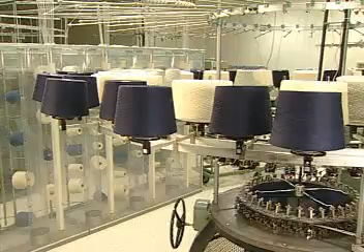Let's start by taking a look at the big picture, the basic configuration of most knitting machines. Commonly used for single knits are circular knitting machines, which pull their yarn supply from creels located either above the machine or next to the machine.

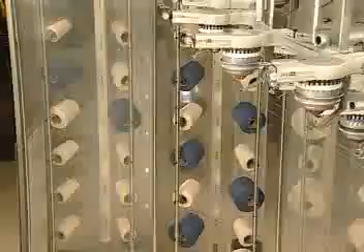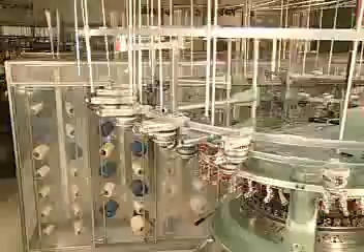To make it easier for technicians to service the creels, it is more usual to find creels located at the side. In this position, less lint falls into knitting elements. Larger packages can be used, and more feeds can be placed on the machine. Whether the creel is at the side or top, the principles for circular knitting are the same.

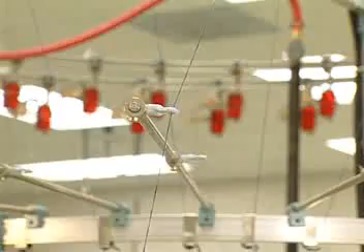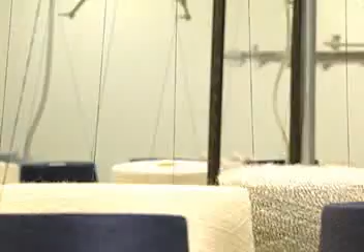Fed from above the knitting elements, yarns move from the yarn supply, or creel, through guides to stop-motion controls above the machine, then back down through tension controls and yarn feeding devices to the knitting elements. Quality products can be produced only when stop-motion and yarn feeding functions are properly set.

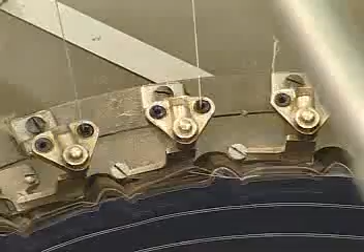The intricate action of knitting, where needles form loops, occurs at the middle of the machine, between the take-up and the yarn feeding mechanism. A close-up shows you how, with circular weft knitting, needles knit one after the other in a sequence for each yarn. Notice how loops are formed horizontally by needles knitting around the cylinder, forming a tube.

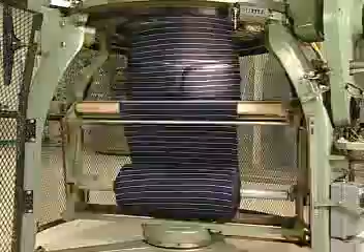After yarn is knit on the knitting elements, the knitted fabric is passed over a spreader mechanism through take-up rolls and is wound into a roll. This elliptical spreader distributes the take-up tension uniformly and enables the fabric to conform to a flat tube.

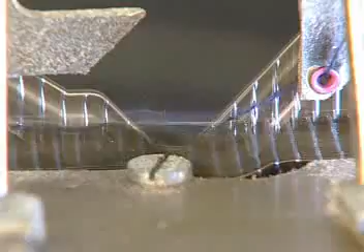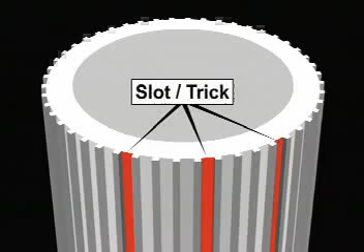In this segment, we describe how needles actually do their work. How are the needles arranged, and what causes them to move? Knitting machines are designed so that each needle can be placed in a groove, cut into the outside of a metal cylinder. Before we show you how these cylinders work, let's define the parts. The cuts or grooves may also be referred to as slots or tricks. The top edge of each groove is called the verge.

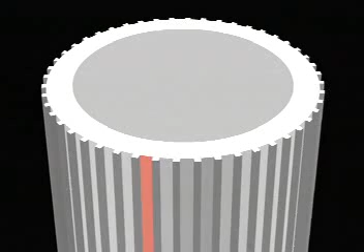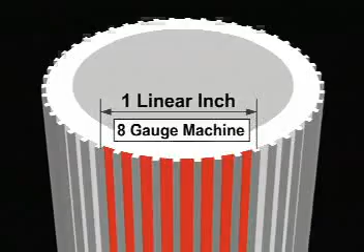These cylinders are very precisely manufactured, so the diameter measured at any place is equal. Machines are classified by the number of cuts per linear inch. This is referred to as the cut or gauge of the machine. For example, an 8-gauge machine has 8 cuts per inch. The total number of cuts around the circumference of the cylinder would indicate the number of needles in the cylinder. The more needles, the wider the fabric.

Now let's take a closer look at the needle itself and label its parts. At the top of each needle is a hook. Below this is a latch, attached with a rivet. Notice that the bottom edge, or cup of the latch, is curved, to fit over and completely close the hook. At the bottom of the needle is a butt, which plays a part in controlling how needles activate, up or down. A needle with a latch is very efficient. When the latch needles are used to create weft knits, the knitting cycle can be completed without any auxiliary attachments.

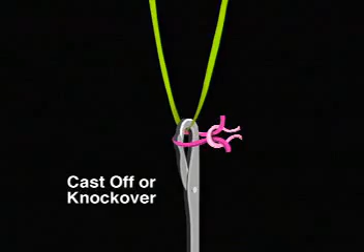Here's how the latch needle works. At rest, or running position, a knit loop rests above or on the latch. As the needle moves up, the old loop, already formed, drops below and clears the latch. As the needle moves down, it receives the new yarn to begin forming a new stitch. The latch is knocked over by the old loop, and this old loop is cast off. The needle moves further down to fully form and complete the new stitch.

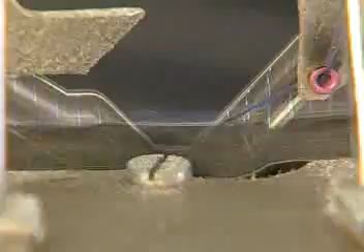The amount of yarn used to form a new stitch determines the stitch length. This is important because stitch length affects the weight, width, and aesthetics of the fabric. On modern-day knitting machines, needles make millions of loops or stitches a day. Needles may need to be replaced due to wear, but they usually last up to 6 months, depending on construction, yarn type, fiber type, and speed.

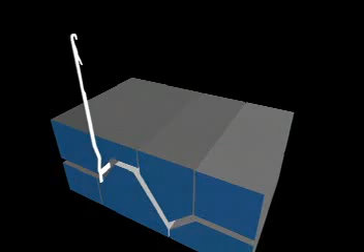Next, let's take a look at what causes the needles to move up and down. In this illustration with a side view, you see how the butt of a needle guides the needle through a path formed by cams. Each cam is designed to allow the needle to run straight or to move up and down. Here's how the needle travels through various stages. At the rest or running position, the needle runs straight over the rest cam.

When it hits the clearing cam, it rides up at a steep angle, which forces the needle to rise and clear the old loop. Then the needle drops when it contacts the stitch cam. As it continues on its path, it catches the new yarn. It continues further down, pulling the new yarn far enough for a new loop or stitch to form as the old loop is cast off. The upthrow cam returns the needle to its resting position so it can begin the cycle again.

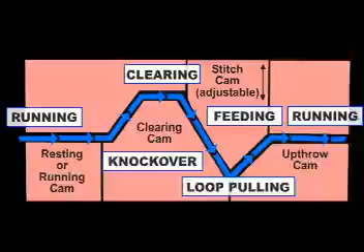Take a look at this same action while the machine works. Watch how needles run through the camways, which cause the needles to rise and fall. And remember that this machine has a cylinder that contains vertical grooves and slots to hold the needles that move.

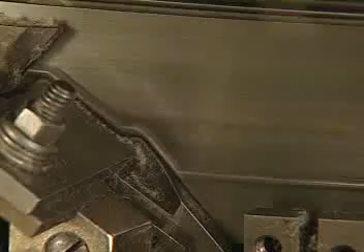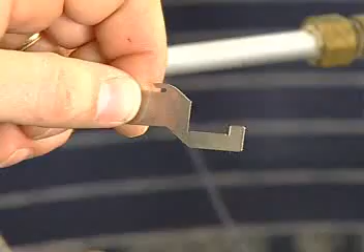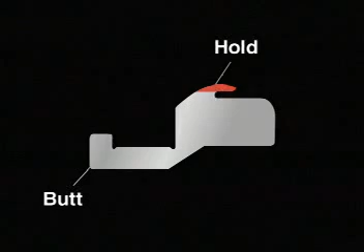As needle activation occurs, how does the machine control the movement of fabric as it knits? There's one more part, placed between each pair of needles, that you need to see to better understand this. It's called a sinker, and here's what it looks like. It's a thin steel element with a distinctive shape. This illustration highlights the parts. A sinker has a butt with a place to insert a cam. It has a hold, a throat, and a nose.

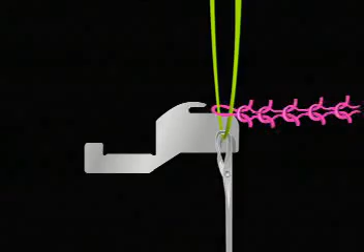As the needle goes up, the sinker moves in to catch the fabric in its throat. Since the fabric can't go up with the rising needle, the old loop now clears the latch. When the hook catches a feeder yarn as the needle moves down, the sinker moves back out of the way, and knockover, cast off, and stitch forming takes place. As the new stitch is formed, the fabric rests on the top of the nose. Here's one last view of needle activation to show you how knit fabric is formed.